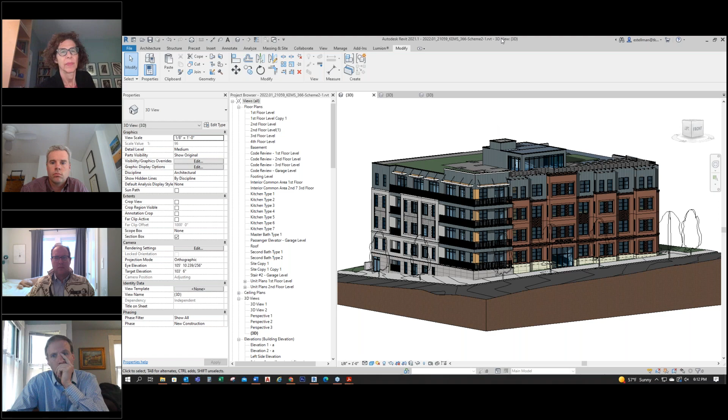Evan, can I stop you for a second? I just want to make sure, so we're seeing your Revit model, is that what we're supposed to be looking at right now? Let me just switch my screens then. Sorry, I have 2 monitors, so I guess it's shared in one monitor and not the other. Is that better? Yes, thank you very much. Oh, that's a little embarrassing, I'm sorry about that.

Okay, so these are the slides I just walked through. So the unit mix is about 57% studios, 21% one bedrooms, 14% two bedrooms, and 8% three bedrooms, for a total of 58 units. It's designed to comply with all of the zoning dimensional requirements. We're just going for a site plan review for the building type and a special permit for the household living.

This is our proposed site plan. We have not changed this since the last meeting, since there are a few changes to the 3 schemes which haven't finalized yet. But just to walk through this, Broadway would be at the bottom of the screen, Thurston on the left side. We are proposing a 12-foot curb step back to our structure.

This plan is showing 3 new street trees and 2 existing street trees. The primary entrance is off of Broadway, around the middle of the building. Then we have a secondary entrance down the hill at the basement level on Thurston Street. There's also a 3rd entrance for the secondary means of egress at the basement level at the rear of the site. The remainder of the site will be infilled with green space and a small space for an underground transformer vault.

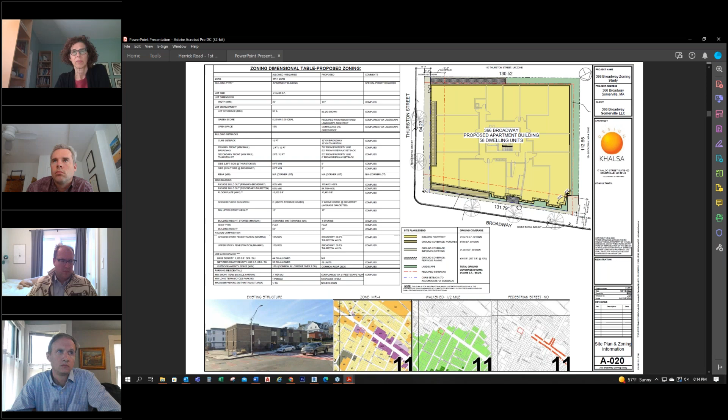Now I'll just walk through all 3 schemes individually. This is just the differences on Thurston Street. In our first scheme, when we introduced the asymmetrical division, the brick portion at the right side got significantly larger than what we were showing before. We also introduced some hierarchy with the bays here, so you can really see where the entrance of the building is.

The right side here is primarily red brick, with standing seam siding at the top, and a cast stone water table at the ground level. To the left of the division, we have open balconies at the corner where we carry the standing seam across and down, and then we introduce a gray brick and some faux cedar material. On the bottom elevation along Thurston Street, you can see the balconies wrap around. The gray brick occupies a majority of this elevation, with faux cedar elements between the windows.

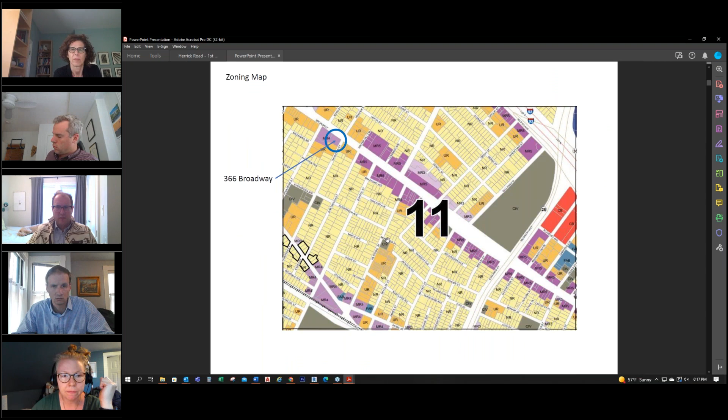Well, it was my understanding that the commission liked facade option 2 from the previous meeting because of the open bay at the corner. It's my understanding you liked the open element of the balconies, but the commission did not like that it was a symmetrical division between the two massings, and I was under the impression that was supposed to be addressed.

Did we actually take a vote to identify option 2? Andrew Graminsky, I think you have the official record from the last time this applicant appeared before the UDC. Can you clarify for us, please?

Yes, in the notes I took from the previous meeting, April 12th, there was a motion by Sherry to approve facade option 1, which was seconded by Frank Valdez. Yeah, I'm not sure, I don't recall that. Are you sure that's for this project? Yeah, I don't recall that either. I don't either, clearly.

Well, I think then, Courtney, in this case, the commission can always take another vote on the facade. Okay, Evan, this isn't a binding vote anyway, so. Evan, are you and the commission all comfortable with letting the applicant proceed with the various options they started to present already? Yes, I am. Okay, yes.

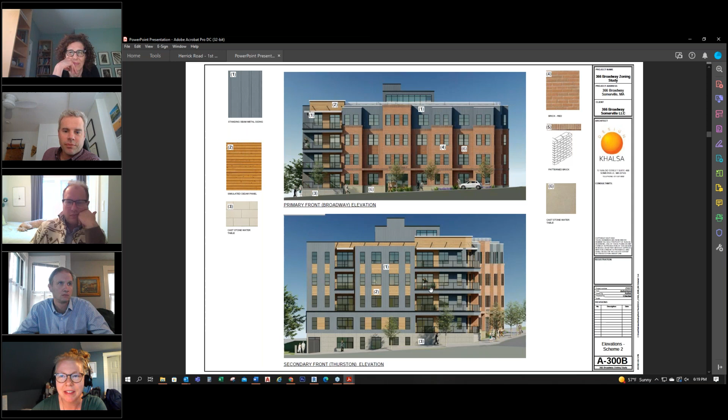Going back to option 2, the elevation along Thurston Street, we introduced the standing seam siding from the upper story of the Broadway elevation. This facade is primarily the simulated cedar with the standing seam. We have the open balconies at the corner, and we also introduce open balconies more towards the left side.

This third option deviates from having the open balconies at the corner like the previous two, but it introduces some elements from facade option 1 from the previous meeting. Along Broadway, we broke the massing into 3, and we're bookending the more contemporary style architecture with 2 brick style massings.

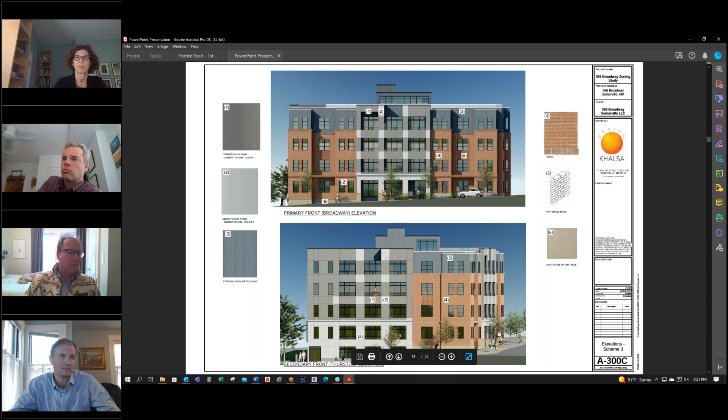Towards the left and the right, we maintain the red brick, and we have the standing seam siding at the top. In the middle, we have a glass wall behind the porches, and then there's a second facade in front of that where we introduced some cementitious panels with alternating colors. As we wrap around Thurston Street, we bring the brick around the corner and terminate it about a third of the way down, and then we carry the same more contemporary style architecture for the remainder of the Thurston Street elevation.

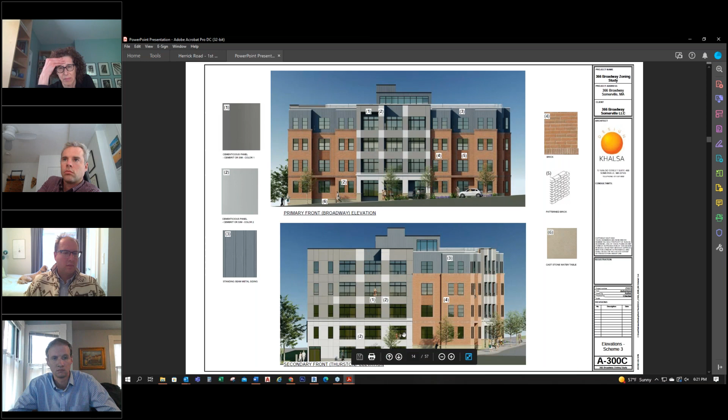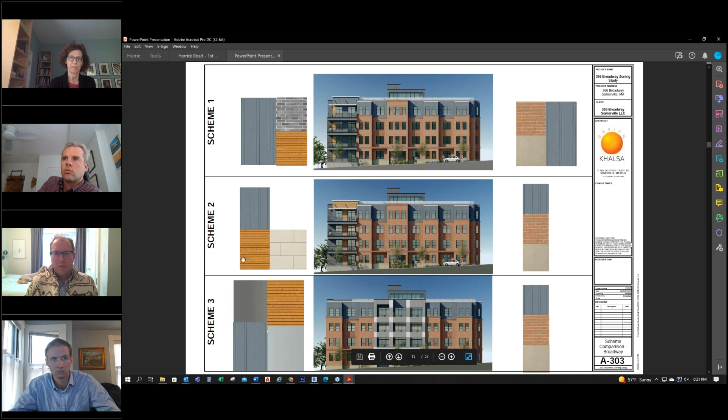These are just the Broadway Street elevations, the three facades all next to each other, showing all the materials. I also have the same for Thurston Street.

Again, just to recap, this is what you saw before. I'm happy if you guys vote on any of these three. This is what we're presenting now, so you have 6 options that you can select for me to refine for the next meeting. If you have any specific questions about anything, I'd be happy to go into a little more detail. If not, I'm open to comment.

Just a clarification of the gray material, is it always standing seam? So in the mansard level it's standing seam, and then in option 2, was it option 2, it becomes a part of the siding also, is that correct? So you're talking about the upper floor here? Yeah, whatever's gray, is it always standing seam?

Yeah, it's the only standing seam siding. In option 1, it's across the top and down the side, and then on Thurston Street it carries around. In option 2, it's also across the top, we just use less of it along Thurston. I'm sorry, more of it along Thurston. Yeah, that's what I thought.

Can you please clarify, in all of these options, are you proposing a thin brick product or a full brick veneer? It's my understanding that the planning board will not approve a thin brick. So it's going to be a full brick. Okay.

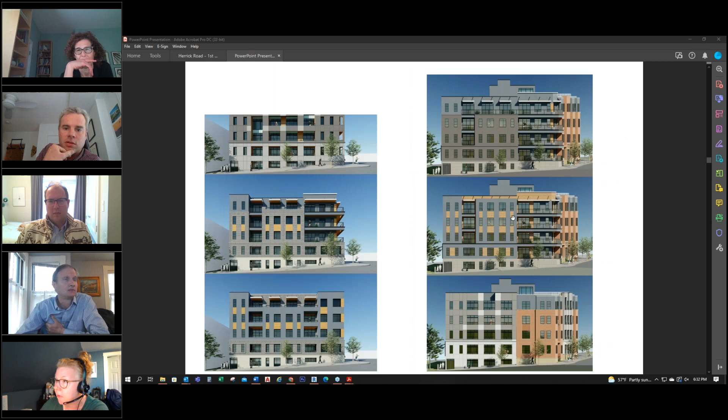I think one of the things you identified, I agree - there's more logic to the organization of materials in option 1, and maybe option 2 could be refined to achieve that same logic. There's the brick at the outer face, then the standing seam metal in the back at the mansard, and at the balconies at the corner. I think the one piece that doesn't follow the logic is the wood pier at the corner, which seems out of place. You'd lose the wood in that scheme if that was the direction. I'm trying to think how Scheme 2 would be refined to achieve that same logic - is it that the wood carries through at all the piers at the balconies, as the backplane material?

Yeah, that's something I can take a look at.

Something I think is successful in scheme 1 is I cut the bay back at the upper story, so the standing seam comes up and across. Where in scheme 2 I have that bay breaking up that material, I think if I take that element from scheme 1 along Thurston Street and bring it down to scheme 2, then you could see the wood on the upper story there, I think that would be successful. But I'll take a look at a few options and show you guys next time.

Yeah, I'd say one other thing about scheme 2 that seems to break the logic is to see the wood as the spandrel piece between the windows in a horizontal orientation, and then to see it used on the lower story as a vertical pier between the windows.

I don't know if it would be... I can play with that. Maybe we just don't use it at the ground floor at all, and then that reads more as a base.

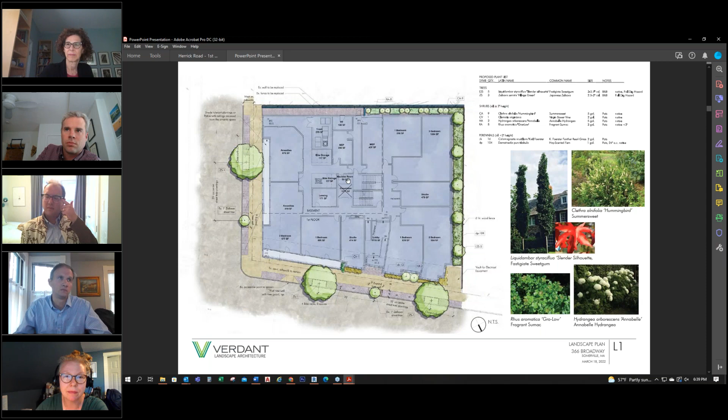Looking at Scheme 2, I'm comfortable with Scheme 1, the way it is, with the comments that my colleagues made. Yes.

And also, I was curious what folks thought of, on the Broadway side, not extending the brick up into the mansard area. I think it's a much stronger scheme without that, but I'm curious. It feels like applique right now to me.

I think you're onto something there. I think either it becomes something that's more differentiated, like it pushes up above the roof line, maybe you carry the cornice at level 4 through, and then it's a different brick expression, and it carries up above the roof line, and it's really something that's different. Or it just becomes another bay.

I like that it's differentiated in its width and it's unique. Maybe there is still something that's different about it, the way it's detailed, what happens at the cornice. I could go either way, either it stays brick and becomes more differentiated, or it becomes standing seam.

Yeah, I would agree with that. I'm not opposed to a more vertical expression above the entry, but I can see the horizontal standing seam taking dominance over that facade. I think the ground level reads perfectly fine as an entrance with the enlarged glass area, and there's a little bit of expression, like an eyebrow above the entrance. So it's reading as an entry.

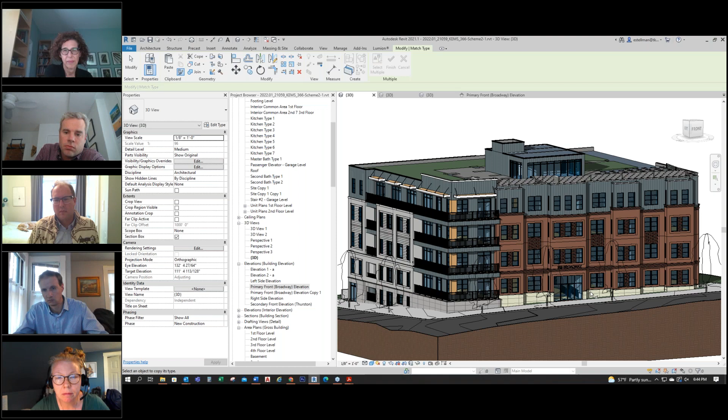This is why I like doing these from home.

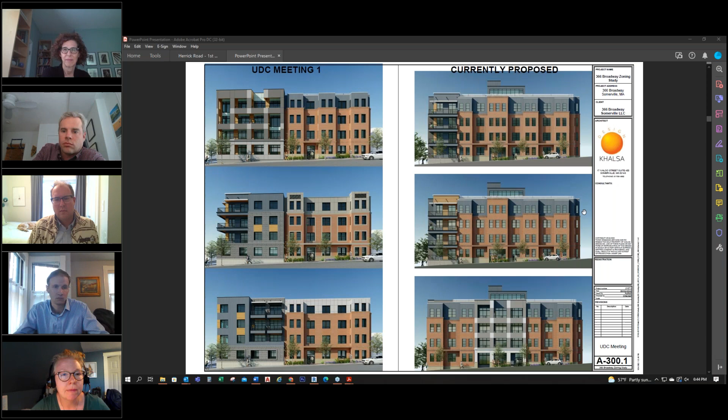So it sounds like the commission seems to be in consensus around facade option 1. I would support that. Do I have a motion for facade option 1?

So moved. I will make the motion. All right, do I have a second? I heard a motion by Tim Talon. I will second. All right, second by Tim Hood.

Before we start voting, since Sherry had some issues with muting and stuff, Sherry, do you have any comments that you'd like to make? I'll give you some time here.

Sherry, you're self-muted. She says she can't connect, and it's fine.

All right, so we'll proceed with a motion made by Tim Talon for facade option 1, seconded by Tim Hood. I will take a roll call vote.

Andrew Arbaugh, yes. Deborah Fennick, yes. Tim Talon, yes. Sherry Ruane...

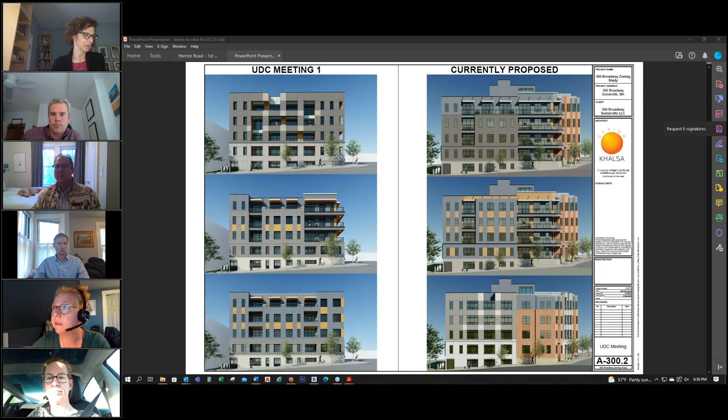All right, so the next order of business on our agenda this evening is the Urban Design Commission's Rules of Procedures and Policy Update. I think this item was brought to the agenda by way of Tim Talon. Tim, would you like to open up the discussion?

Sure, so we've talked a few times about this, back in November.

We can't hear you. Thank you, whoever unmuted me, thank you.

So we met back in November 14th. We had, I think, a really good discussion among commission members—Dan, Sarah, Courtney, and Andrew, I don't know who else attended—about a number of things related to how the commission functions, our relationship with the planning board, our scope. So I was hoping we could get a progress update on some of those. I have some specifics I'm particularly interested in, but in general, status of updates to the rules and regulations.